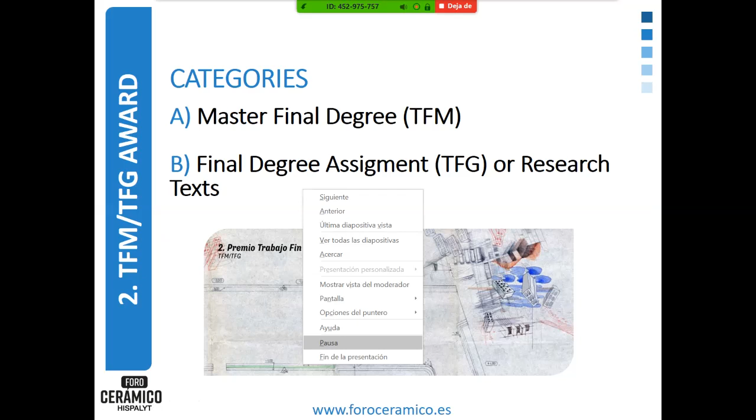They are also offering another type of activity that I think is interesting, even though we can only compete with some categories because we are still not developing all of the grades. That's an award for your own work that you've already developed. It's not something you have to do, it's something you've already done for master final degrees and in the final degree assignment.

All of them have to be based on fabric and face brick solutions, since they work with those materials. So if you've got work that you think fits those categories, you can go for the inscription. Again, it's free, check the website for the basis, and the deadline will be in July.

With interesting prizes. I think something really interesting too is that the final degree award is also open for teachers. So teachers, if you have investigation or research about face brick, you can compete for that award.

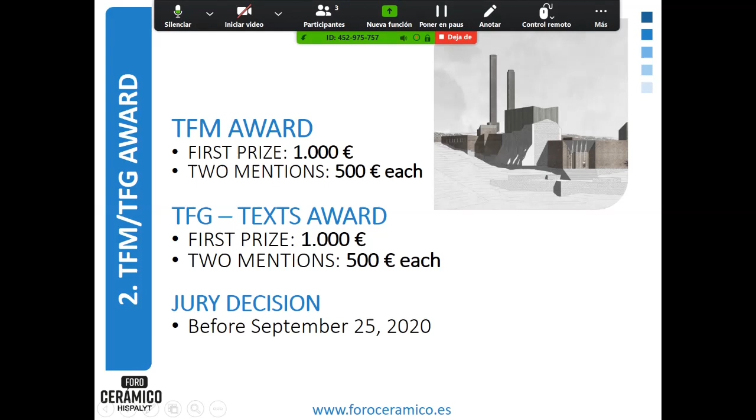The delivery and jury decision will take place in September, with a professional jury from schools all over the country. The third activity that the Foro Cerámico promotes is these learned lessons, which is why we've got Josep here with us today.

These are lectures from different professional studios that work in a really interesting way with these materials, all over the country, even in Portugal. Some of them are already recorded, so you can check them and see them on the website of the Foro.

And different typologies, different scale, different types of how they work with those ceramic materials. So really interesting, all of them. And finally, we've got here Harquitectes, that is the one that is going to talk today with us. Other activities: the conferences, where they talk much more about technical matters.

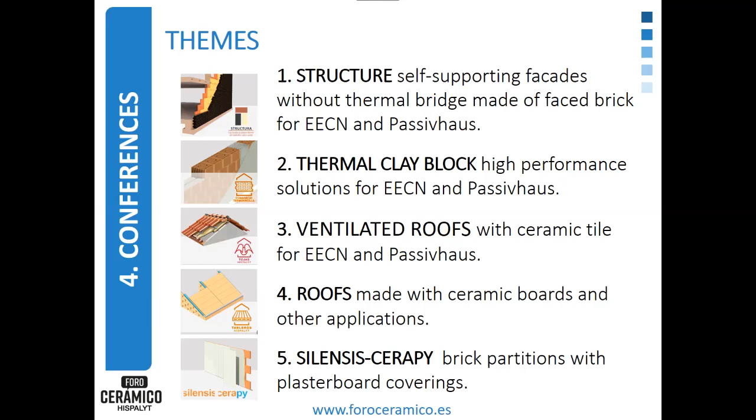So you can find here some building materials and how they work. So structure, thermal clay block, ventilated roofs, all searching for the passive house goal. Ceramic roofs, different types of partitions, all made of ceramic. And with this activity, we're trying as well with the Foro to be able to offer them to you, especially the ones that are working with these ceramic materials in your own project in the

competition. And finally, we've got these factory visits, where the main objective is for you to see how these materials are being built, so you can physically touch them and see them in real life. So that's another interesting activity for you. And all of that finally is disseminated in different ways.

So like the awards ceremony for the prizes of the competitions at different levels, and the awards for the final degree projects. Also, they are going to publish a book where all that is going to be collected, and they can offer you that book as participants. And through the website of the Foro Cerámico, you can check all these activities. They are even saying here that they will publish the final degree work in the magazine Con Arquitectura.

So I think there are different activities promoted by the Foro that are really interesting for you students. So you can check all of that on the website, or even email me if you need any further information. These are activities that we are trying to offer you as a complement, okay?

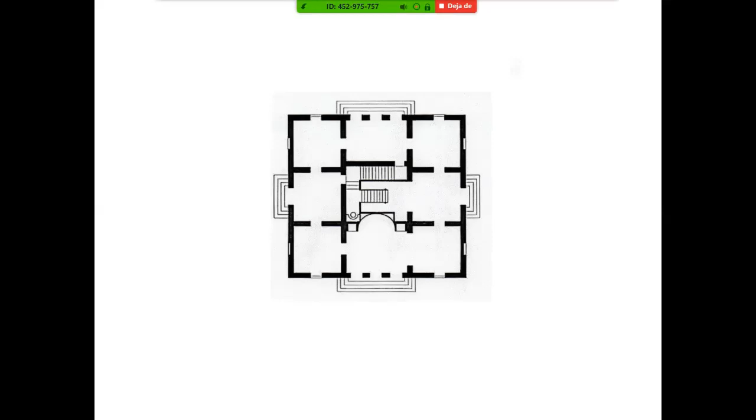The relation between space and structure was there at the very beginning of the office, but it was during a journey to a very famous architectural example, the Schinkel Pavilion at Charlottenburg, when we discovered that what used to be a blurry idea about what kind of architecture we like, that commonplace, was something very specific: the kind of architecture where the geometry of the space is defined by the geometry of the structure.

For me, this sounds obvious, naive, but if you see what is happening in contemporary architecture, it's hard to find examples that are still working with that idea, that the structure through its geometry gives geometrical conditions to the space. The space is high or wide or narrow because of the structure. It's not like this in general. In general, what gives geometrical conditions to the space is the coatings, the refurbishments, the furniture. We're not giving conditions to the space through the structure.

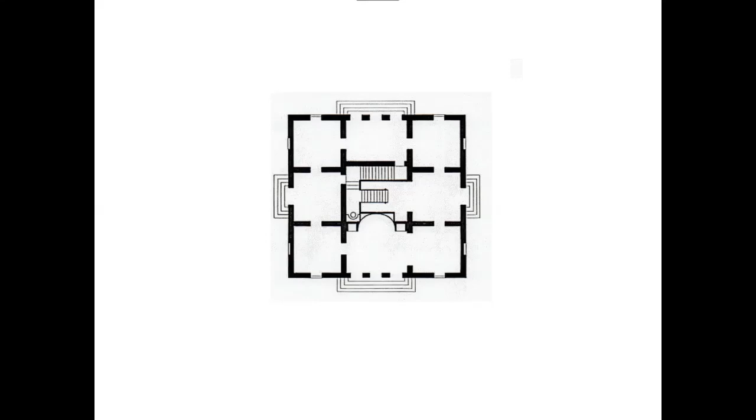And this is a lack for architecture. Of course, what we do is not the only way to do architecture, and I don't want to look dogmatic, talking about just one way to develop architecture. But it's the way we feel really comfortable with, because for us this is about experience. This is something we experienced about 17 years ago, going to Germany and visiting this very famous architectural example, where we suddenly discovered that the blurry commonplace feeling could be defined as architectures where geometry, space, and structure are the same.

This is another journey we did, a completely different place, but the same feeling. That helped us get closer to that strong idea for the office. This is a quarry in Menorca, a real quarry that was in production when we visited. It looks like the Tindaya project from Chillida, the sculptor. It was one of his famous non-realized projects, an artistic space in the Canary Islands.

But this is a real place, an amazing place where the mountain, the stone, is a clear example of what I'm talking about, how the structure is defining the conditions of the space. For us, it's so pure, so powerful that, at least as a group, we haven't found a different way to develop our ideas.

This example is amazing, and very easy to visit. It's in Barcelona, just 2.5 hours from here. This is the library of the UPF University. It's a fantastic joint venture with 100 years of history, from Josep Fontserè, a famous architect and engineer who developed a lot of markets in Barcelona at the end of the 19th century. And 100 years after, Clotet Paricio developed a library inside this building, which used to be just an infrastructure to hold up 3 meters of water, 17 meters high, to supply water to the big park of La Ciutadella in Barcelona.

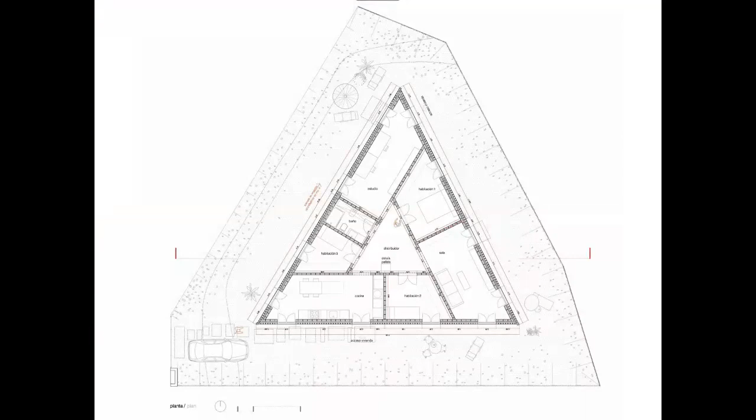But what happened with this house, and what gives reason for the final look of the house, was that during the process, the economic crisis showed up in Europe and especially in Spain. In fact, a lot of people here call that crisis the brick crisis, because the part of the economy in Spain that was deeply affected was construction.

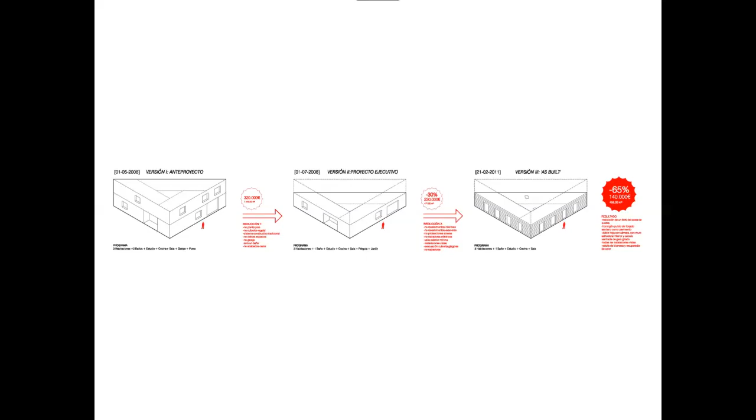But even so, when they went to the bank asking for the mortgage, the bank answered that it was impossible. We have to imagine that it happened from 2006 to 2011. So they discovered the crisis in a meeting with a bank officer telling them the mortgage was not possible, that they could only get half of what was supposed. From 320,000, the intermediate step was 230,000, but the only money they could get from the bank was 140,000. So through that process, the house suddenly got totally naked.

What was the economic strategy here? It's not as simple as saying, okay, we get the house naked. No, it was trying to understand, in the complex construction process of a house, who can do all the steps. It could be the plumber, the carpenter, or in our vernacular tradition, the one who could assume all the roles of the construction process was the mason. So we redefined the whole house, also the plumbing, to be built by the mason. And it was like one weekend of work.

Because after 2 years of working, after the answer of the bank, they asked us for a meeting. They told us that the house was not possible, that the only way was to build a mobile home for a certain number of years, waiting for better years to develop the house. We answered that if they gave us a couple of days to redefine the project, and they did agree.

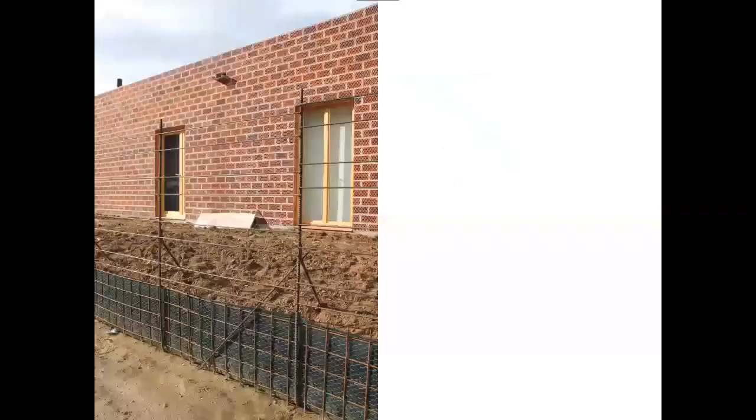Well, this is an example that also to hold up the soil, we developed a system that could be done by one guy. So it's not necessary even to produce big foundations to fix the soil in the garden.

This is hard work for the architect because this house, a very small house, 120 square meters, is drawn brick by brick to reduce as much as possible the amount of waste materials. Okay, so this corner is like this not for a formal desire, but for an efficiency desire, to reduce the amount of waste material.

Well, after that step, we became a little bit more comfortable with that idea of naked bricks and with the idea of uncoated architecture, and we discovered that there's a large number of options in terms of expression, in terms of architectural quality. So after the previous house, which was a survival exercise, we did a house where it was not about survival, but about luxury, but working again with bricks.

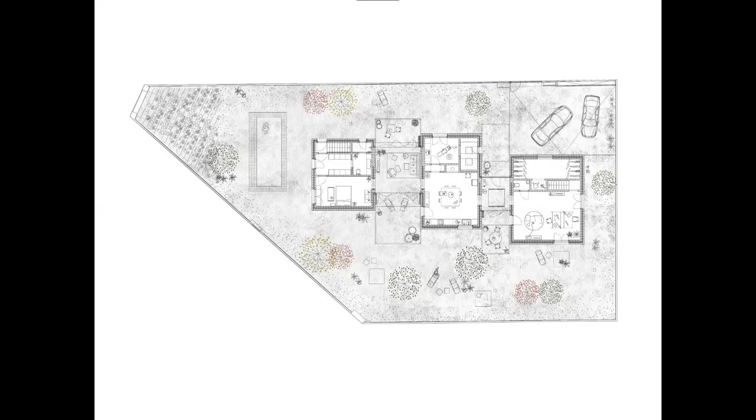But again, with a very humble element like the bricks, but trying to develop a very specific, very professional, very serious process of research in construction. It's like 12 years ago. So, I mean, for us it was a

learning process to understand what it means to work with structural walls, what it means to avoid thermal breaches between outside and inside. So it was a pretty interesting process. For us, it was a big learning process.

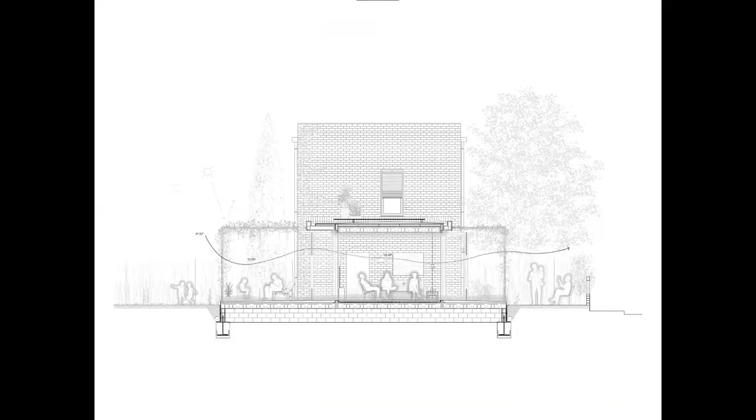The porch works as a real porch in summer and as a gallery in winter, as I said, producing that double kind of, both kinds of spaces are clearly defined by a structure, but absolutely opposite. So this is something that we also like to produce, that idea of contrast, that when you're crossing the thresholds of the houses, you're coming from one atmosphere to the opposite. This is something that for us gives an idea of narrative, an idea of process.

I deeply believe that what we do as architects is what we have to project. I think that the hardest work when you are at the school is to understand what it means to project architecture. And my own definition is that to project architecture is to project the perform of people and the perform of spaces. I mean, the idea of performing is what we have to project. Then what we design is the conditions to make possible that kind of performance. And at the end, the only decision that we really do through our drawings is to reorganize material.

But the idea of projection is not about objects. It's about living. The idea of projection, what we have to preview in the future, is what people are going to do, what is going to happen with the air, what will be the performing. Performing is not only about people, it's also about the performing of material, because that wall has inertia and is performing. That wall is not coated, so it has a lot of pores, so it's performing also in terms of humidity. So what we have to project is a performing.

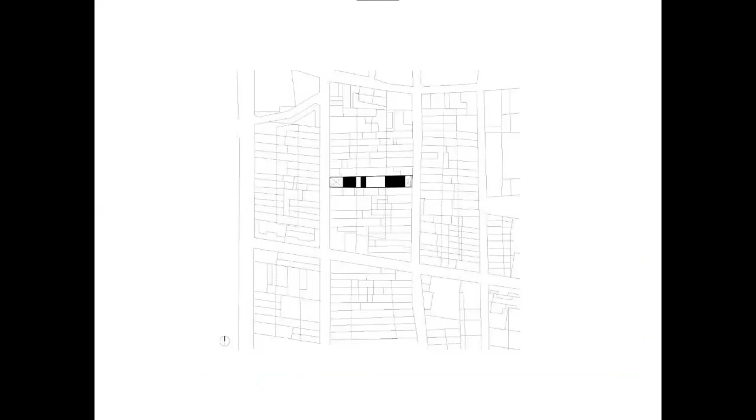This is a big house in the center of a small village close to the office, and is also based on walls. It's a house that is a large path crossing walls and so on. And in terms of typology, it's interesting and so on. But I don't want to talk about the typology.

I want to talk about that space. This is the entrance of the house. It's not a courtyard, it's not a patio, it's not a garden, but it's everything at the same time, because it works as a greenhouse in winter and it works as a patio in summer.

I want to show you this picture in terms of how, coming from that idea of working with walls, in this case we try to get deeper into the behavior of the wall. The first approach is about how it works in terms of a structure. So we began to place the lighter bricks on the top of the wall and the more dense, narrow bricks on the bottom, because in terms of structural behavior, it's logical that the heavy is higher at the base of the wall.

So on the other hand, it's a wall, so it basically works in compression, but we need holes in that wall. So we try to develop a wall that works at compression and at flexion at the same time, just with bricks. This house has no beams to support the spans of the house. It's the bricks with a very narrow reinforcement at every layer that work as a brick beam. That's why at certain levels of the wall there are narrow bricks, because at the height of a hole in certain places of the house, the whole layer is reinforced to assume it has to work as flexion.

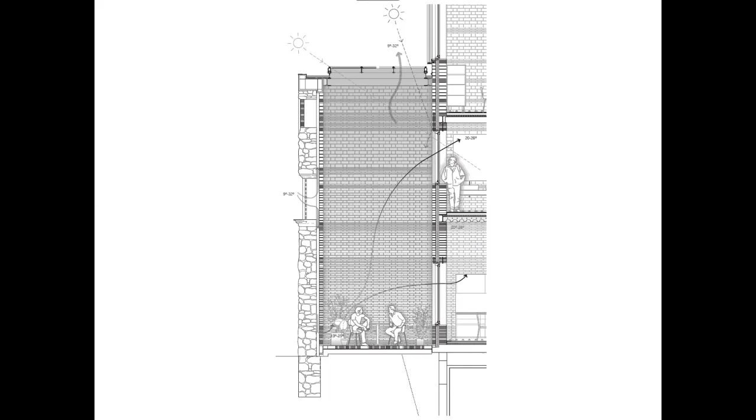The formal drawing and the construction drawing are the same, because this drawing explains why every brick is in the place that it is, but at the same time it's our idea of facade, our idea of formal perception of the space.

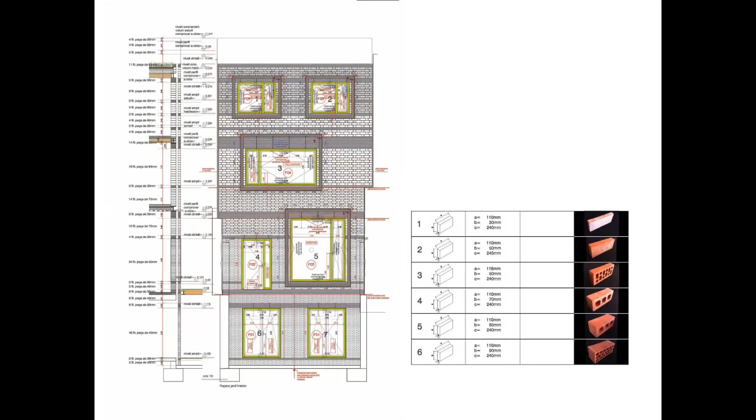Then it's a nice path, one space after another, crossing those halls and the garden, and it's a succession of boxes, sometimes open, sometimes closed, but brick boxes that define a series of spaces.

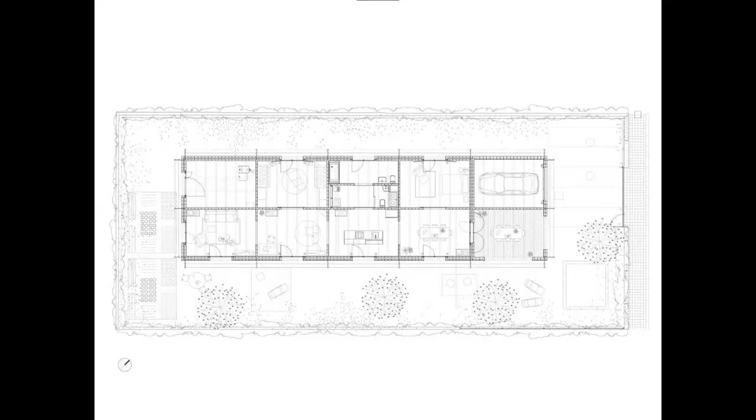But this case is interesting for a different thing. The budget was so low that we didn't have enough for the foundations, or at least for deep foundations. And the soil of the plot was really bad. So it was needed to place very strong and deep foundations, because the first layer of soil was absolutely not enough in terms of support.

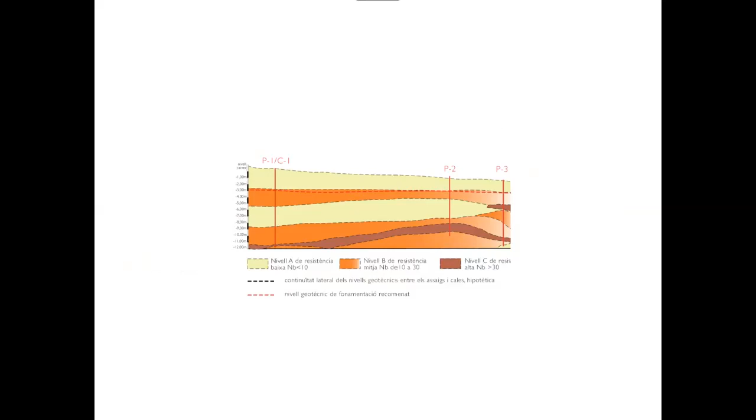So what we did was to build just one floor house, to put all the heavy load on all the walls. All the walls work as a structure to dissipate the load into the soil. And in a very narrow margin, we were able to place the foundations in the natural slope. But of course the house has to be flat, so the geometrical difference between the pavement and the natural slope of the floor was filled with small stones, gravel.

So we just filled it with more inertia. We're always talking about the same thing, I'm sorry.

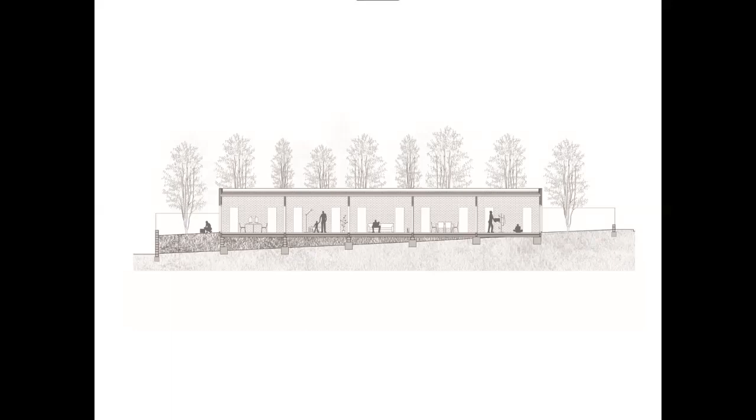So the funny thing in the house is that we are not working only with the inertia of the walls, we're also working with the inertia of those small clean stones in the pavement, and we achieve the level of climate that we don't get by natural reasons with fresh or cold air that we make cross that big amount of inertia.

So the air is pre-treated a little bit, just a couple of degrees. We get air from outside, raise it just two or three degrees in winter, or lower in summer, and make all the air cross that huge amount of inertia before it comes into the space. Then it gets pushed up by a mechanical fan on top. So we help a little bit the natural behavior of the house, using its specific conditions.

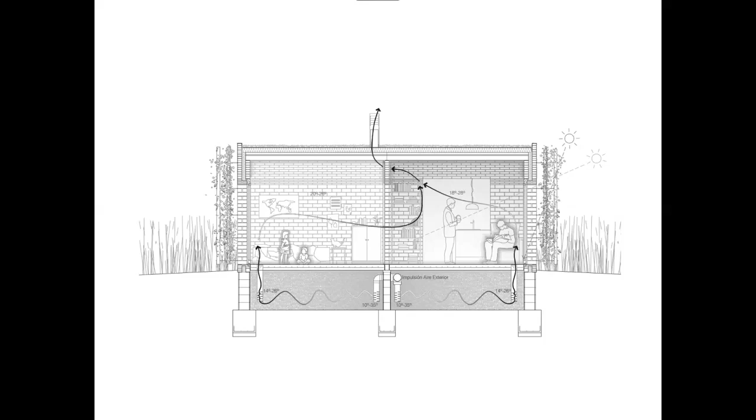So at the end, I hope our houses look more like a porch than like a house. I have to say that 70% of the hours in Spain, you will live happier in a porch than in a house, far better even than under a tree, because of the inertia.

I also have the clear idea that to project is also to do research. Without research, without a personal aim of research, it's impossible to do real projects. If you don't have that personal concern, you go to your teachers asking for permission, saying I'm doing it well enough to pass. But if you have your personal aim in terms of research, you develop your project and show it to your teacher not asking for permission, but sharing how happy you are because you've discovered something. For me, to research and to project is basically synonymous.

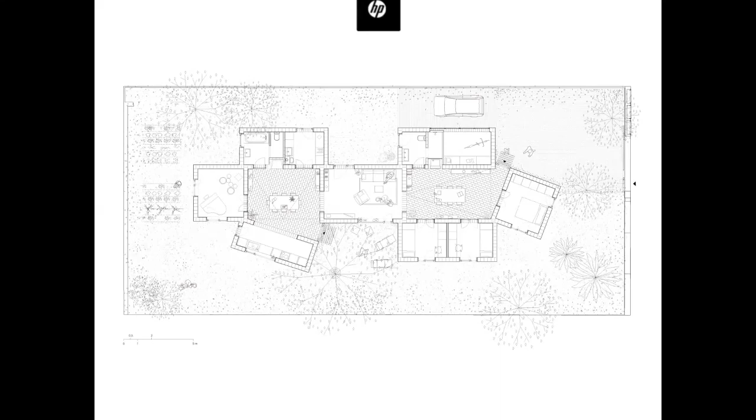One courtyard is oriented to the south, the other to the east. Here in Spain, we never face west if we can avoid it. I say this because I've been in Sweden, and the west is far more valued there than here in the south, because the sun is good enough to admit. But here, west in summer is terrible, because you have not only the heat of the sun, but also the heat of the air after the whole day. So the west orientation is terrible.

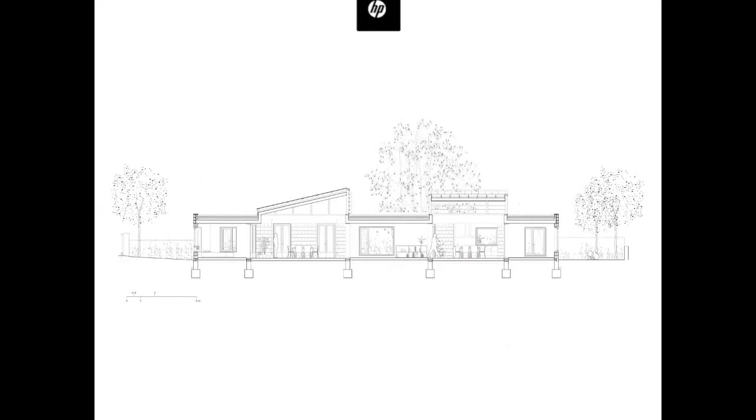This is a beautiful drawing again, but it's the same idea: the drawing of the architecture is at the same time the basic construction process drawing, because it's talking about the element that gives conditions to the space—that brick. As you see, we are very severe, serious, and rigorous in drawing brick by brick, if we are to understand how it performs.

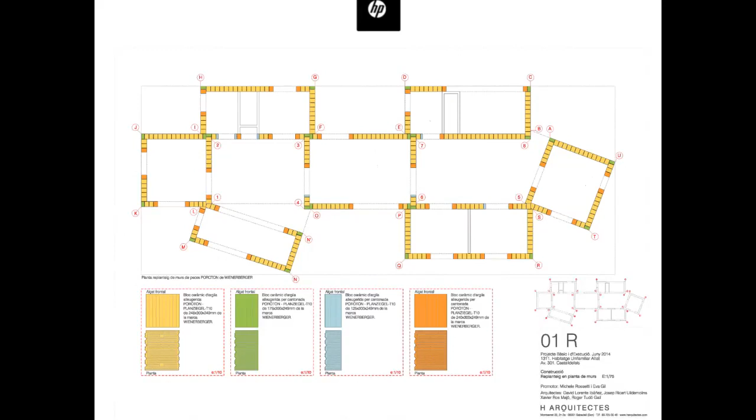Okay, and that's my last project that I will explain. This is a facility in Barcelona, Cristalleries Planell. This used to be a factory, a glass craft work factory at the beginning of the 20th century. This is in the Las Corts neighborhood, not far away from Football Club Barcelona Stadium. So it's not in the center of the city, but it's in the center of one of the neighborhoods of

the city. Barcelona, as you know, used to be a group of small villages surrounding what used to be a city inside the original walls. Till the end of the 19th century, Barcelona was just a city inside the walls. Then it grows up through the plain and so on, and all those small villages get included into the big city. Las Corts was one of these original villages, now a neighborhood.

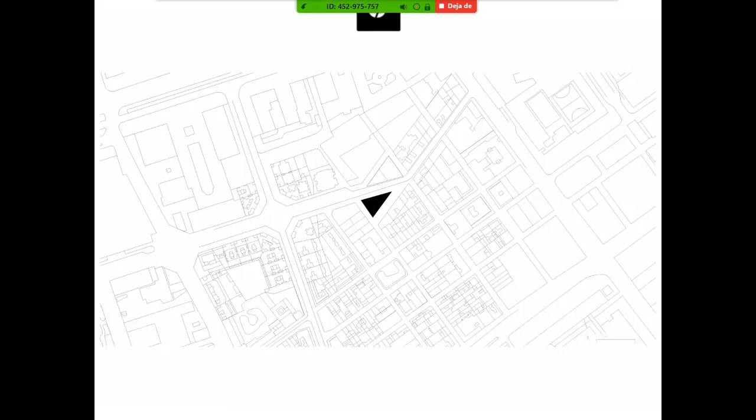I want to explain this project. It's the same as the projects before, but this is very specific: how the structure gives conditions to the air. Something that we have discovered is that the air is something that we don't see, and we don't pay much attention to the air. But it's through the air that we get temperature, that we get the sense of humidity. Also vision is through the air.

So the air is the interface between the feeling, the personal perception, and the conditions that we give through our architecture. So paying attention to the air began to seem pretty important. This is a project where you will see that the shape is very orthogonal, very serious, but all the decisions are based on how to pay attention to the air.

But in terms of architecture and in terms of strategies, it's very simple. As we have two facades, concerned about these original facades with industrial proportions, and we have to place here a new building, a new facility for adult school. This is an adult school, adult people who want to learn Catalan, and also a facility for neighborhood community groups and so on. So there was a lot of program to place here, so no high floors and so on.

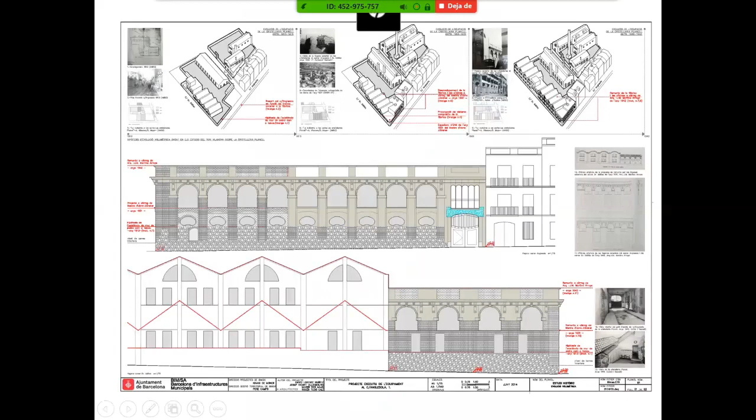We decided that thanks to that 2 steps decision, producing that courtyard, we not only make the natural light more homogeneous, but we also get the ceiling natural light, okay, because of the courtyard.

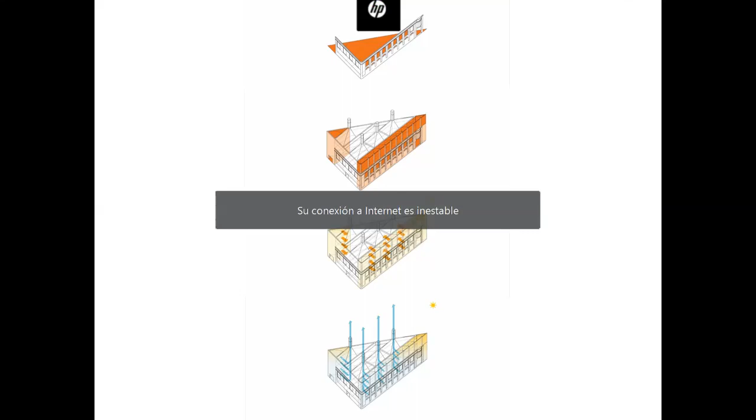After that, we discovered that it would be a good decision to make it perform not only as a courtyard, but as an atrium. So we decided to cover that courtyard with an ETFE layer, a plastic layer, a captation layer, that makes this courtyard work as a greenhouse in winter and as a garden in summer, okay? Closing and opening to get more or less ventilation. So in winter it is a greenhouse, like in the third step. In summer there's a lot of air crossing the building.

Why am I saying that all the decisions have to give conditions to the air? Because this building is a facility. In a facility, it's not enough to come into an agreement with the customer. You have to be very serious with legal minimums in terms of health, in terms of structure, and so on. But we wanted to make it work as naturally as possible. So all this building is based on its natural performance. What is its natural performance?

That is a classroom. It's basically adult people, 25 adult people in a small classroom, because the plot is very narrow. What does it mean? That in winter time, there is no need of any heating system, okay? It's in the nature of the building to be in good conditions in winter time. This could be perfect. I suppose that you know or have some notions about the passive house. Okay, so this is basically a passive house idea.

So let's keep all the warmth inside in winter, because we have 25 people working as heaters, walking around. And let's open as much as possible in summer, where the inertia of the structure will help me to temper the inside space. This is perfect, but in winter, if you don't want to die with the rest of the 24, you need to renovate the air, okay? And in summer, if you want to dissipate the excess of heat in the inertia, you need an incredible engine to move all the air necessary, okay?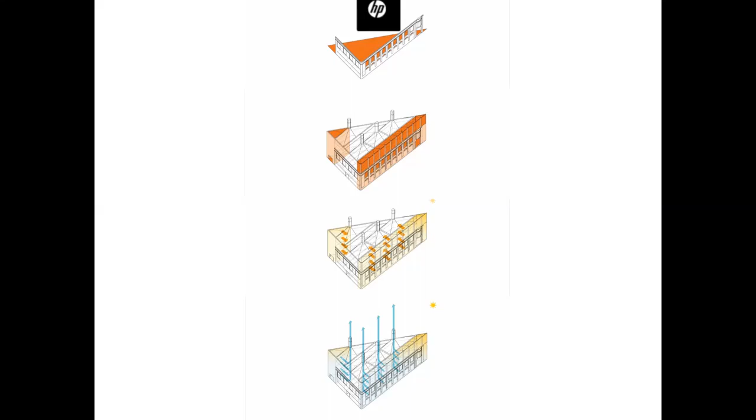This roof is a natural engine. This is a sun chimney. Well, in fact, 4 sun chimneys able to move 15,000 cubic meters of air per hour in summertime. And this is not based on my desire. This is based on something called thermodynamics. And the good part of thermodynamics is that it never gets broken. Something that you cannot say about a mechanical fan, okay?

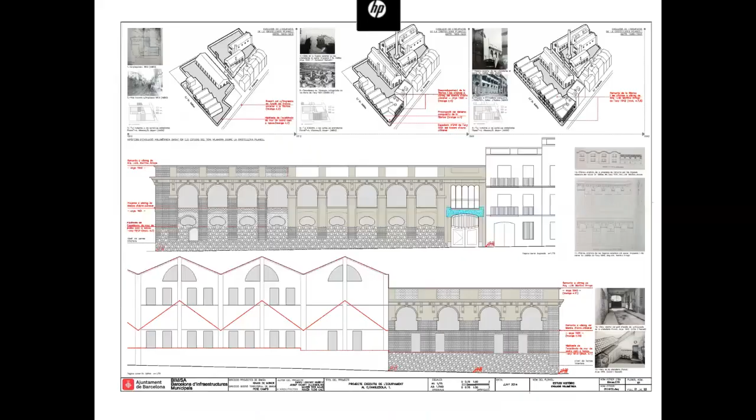Of course there are some fans in that building because we have to comply with certain laws, and in certain specific moments, maybe the sun chimney is not working all right. But the fan that we've developed is just in case of emergency, and is like this compared to the fan that should be there to move all that huge amount of air. Okay, so we get the inertia, we get the natural engine.

Then there's no pipes. Why there's no pipes? Because when you design the movement of the air based on an architecture based on inertia, you don't have to use pipes, because you need that the air cures all the surfaces of the walls. You're not moving air from one place to another through a pipe. You have to move air from the patio to the classroom, from the classroom to another place, and so on.

But you need that the air takes off the excess of heat. So you will see that in our architectures, in general, there's no pipes. And it doesn't mean that there's no strategy in terms of comfort and renovation and so on. But we really need to discharge, to dissipate the inertia. So from the patio, the air comes to the classrooms with those windows that open and close and so on.

Well, the structure here, but the point, so the structure gives shape to the program. The good part of the triangle is that because of the geometry of the triangle, the proportion between classrooms and administration service gets a good proportion, just giving the same structural distance between walls. On the north side, there's the administrative program. In the south side, there's the classrooms program.

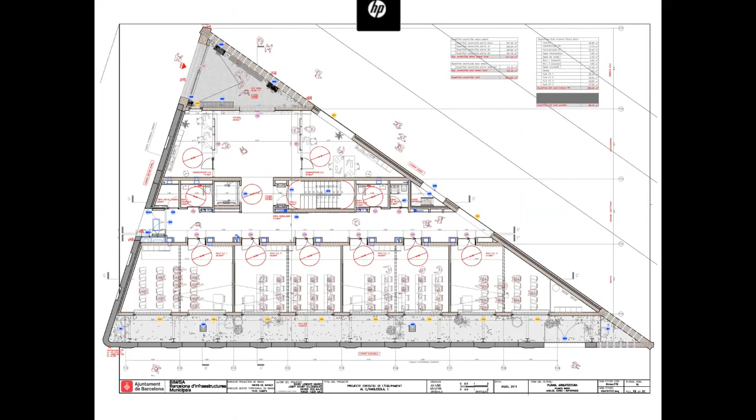This is the entrance, because the south courtyard is completely different, but the north and the south courtyard work the same way. It's the pre-treatment of the air. So before the air comes to the classroom, it gets warmer in winter in the greenhouse, or it gets fresh thanks to the inertia and the vegetation in the courtyards. Then you cross the wall. Every white wall is a structural wall with that corridor that gives service to all the classrooms.

And here you have that nice experience that thanks to that just 2 meters courtyard, you have that double perception of the two facades in front of each other, and that idea of contrast between the atmosphere of what is happening on one side and what is happening inside. The administrative part is working in front of the other courtyard, the north one.

There's also something that I haven't talked about before, that we have discovered that idea of uncoated materials gives also a tip to the architectural experience, which is something a little bit naive, but at the same time I think is beautiful. People, we love tales. In fact, today I'm explaining you a tale, which is the Harquitectes' tale. But in general, we love tales, we love narratives, and so on. And we have the feeling that the uncoated solutions explain something, at least they are explaining the construction process.

I'm sure that everybody agrees here that it is a nice feeling to come into a house, an old house that has something to explain to you, that is explaining its own history, or into a vintage building, into a castle, into an old farmhouse. You always have that feeling of a tale, that the house is explaining its own history. I think that is a nice feeling that, in general, if you're not a psychopath, we can share more or less.

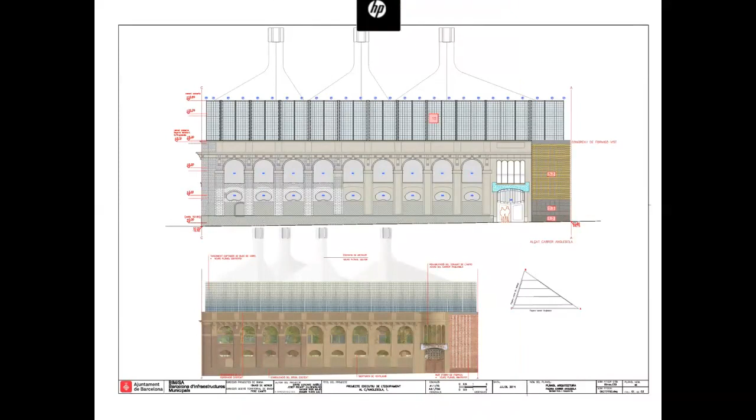So I think that this is the proper position in terms of heritage. That is not only to put a frame, but to put in use. So the old wall, which was a ruin, which was just pure compositional heritage, now is giving conditions to the courtyards, is supporting part of the facade, and is working as it was designed originally, as a facade, as a wall, as a structure, and so on.

In the south facade, this is a real structural wall, but it is working as a greenhouse, because the courtyard in winter works as a greenhouse. In summer, all the halls get open, the top of the roof gets open, and then it becomes again a courtyard.

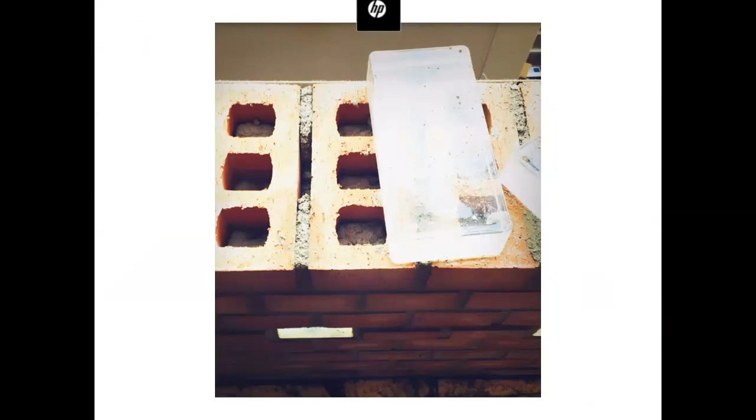Some people think that this is like a trademark of Harquitectes, because it's very similar to the first house that I've shown. It's just because of the conditions of the plot. You've seen that it's not about us. This is a nice brick that we discovered during the process, which is a mass glass brick that we used to give more light into the courtyards.

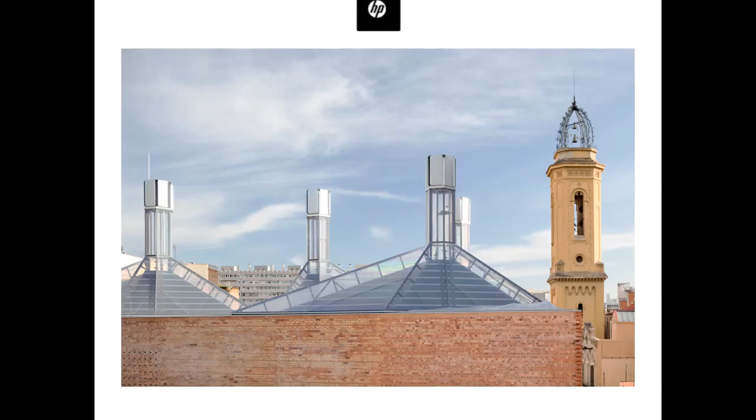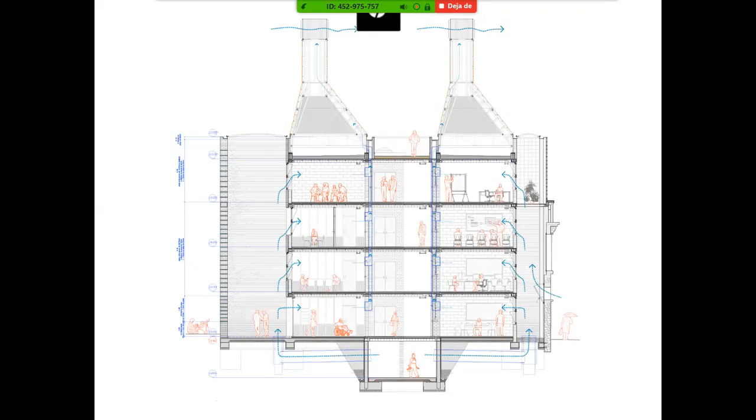And just to end, this is to repeat again that idea of behavior, the general performance of the building, talking a little bit more about the most interesting part of the building, which is the sun chimney. A sun chimney has a very nice effect. A sun chimney is a pure greenhouse effect. Okay, it is a greenhouse with a transparent layer and a black layer. It's a greenhouse without any kind of inertia. It's completely the opposite, because you need the sun chimney effect at the moment.

Okay. So when there's a lot of sun, the black layer gets to 70, 90 degrees. So that produces a huge amount of depression, because the air in between the two layers gets really hot. So as you know, hot air goes up very fast, and that depression has to be substituted by the same amount of air. And this air comes from the classrooms. Okay, so this is the basic idea.

But what is funny about that? In a passive house concept, in winter time, I want to move as little air as possible because I want to keep the warmth inside the classrooms, okay? And the sun chimney in Barcelona, in winter, doesn't work very well because the sun goes lower, okay? There are fewer hours of sun, the sun is less potent, okay? And in summer it is the opposite. In summer, the slope of the sun chimney is the perfect orientation for the height of the sun. There are more hours of sun.

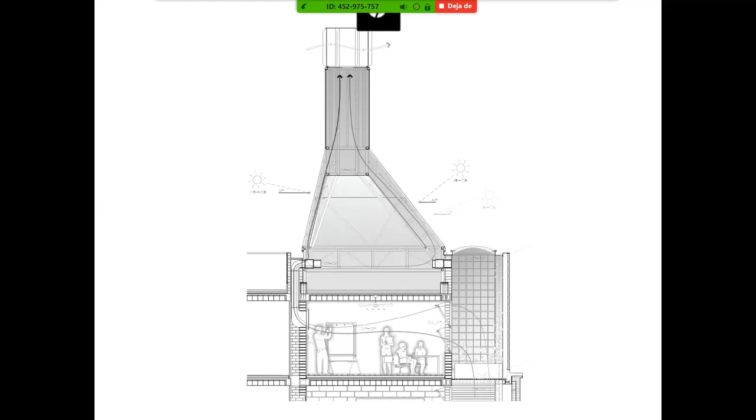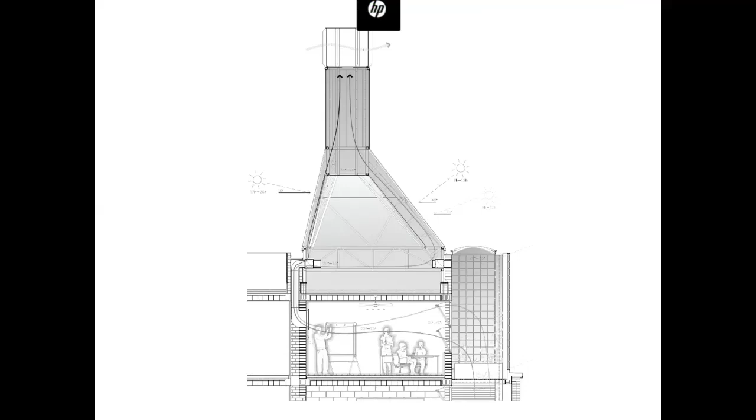So a greenhouse that is a bad idea in Barcelona suddenly becomes the perfect invention to move air, because it moves a lot of air in summer, when I want to dissipate the excess heat inside the classroom, and it is an awful invention in winter, when I want to move as little as possible. To do that, it's not possible without the help of engineers. I don't want to look as if I'm the one who developed this. We developed the concept. The concept came from the architecture, the idea to find natural processes, natural engines, to work with inertia and so on.

But to develop it, to be serious about that, what is not possible anymore is to talk about sustainability in terms of common sense. I used to have teachers that told me that to talk about sustainability is to talk about common sense, heritage, big walls, and so on. And of course it's about that, because our grandparents used to make very wise decisions about their homes and so on. It's true. But to do that kind of stuff, it's not only possible with common sense.

You need the help of engineers, but special engineers. Engineers who want to solve the comfort, not with artificial engines, but with natural behaviors process. Not all the engineers are able to do that or want to do that. But we are lucky because we found during our 20 years a lot of people that want to perform as engineers, but to produce comfort through natural conditions, not through artificial conditions.

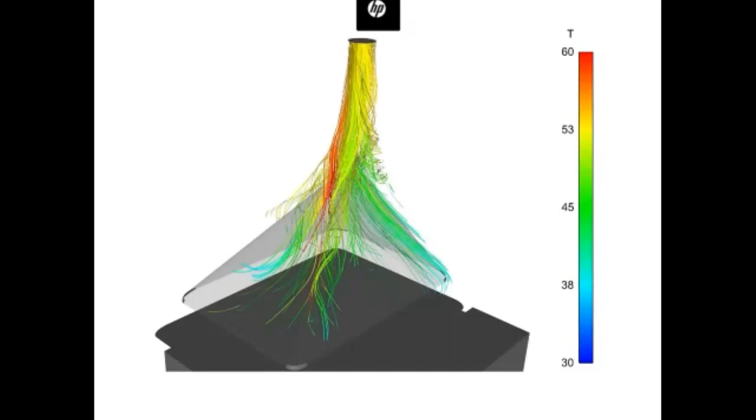And with that last nice sentence, I will end because I'm really tired. Easy questions.